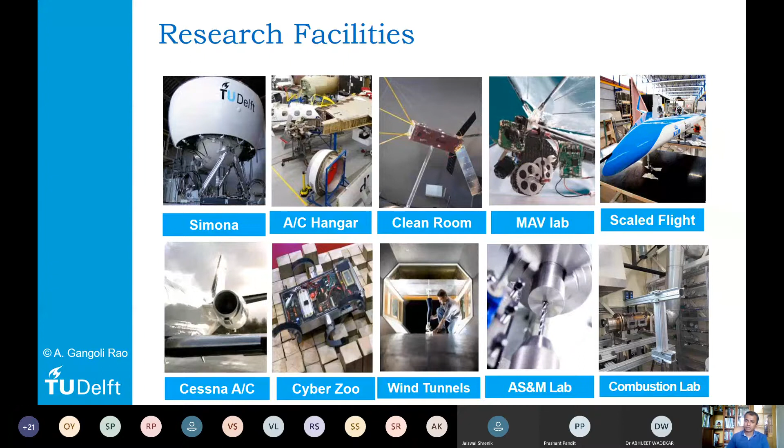Okay, so let's go to the topic and let's talk about the first flight. Again, if you have any questions, please do not hesitate to put them in the chat box.

So the first flight, I mean, flying has always been a dream. Whenever we see birds, we think, wow, they can fly, can we do that as well, right? I would like to ask you a question. You don't have to answer now, but think for yourself: would we fly if there were no birds in the world? That's, of course, a kind of philosophical question. But think about it.

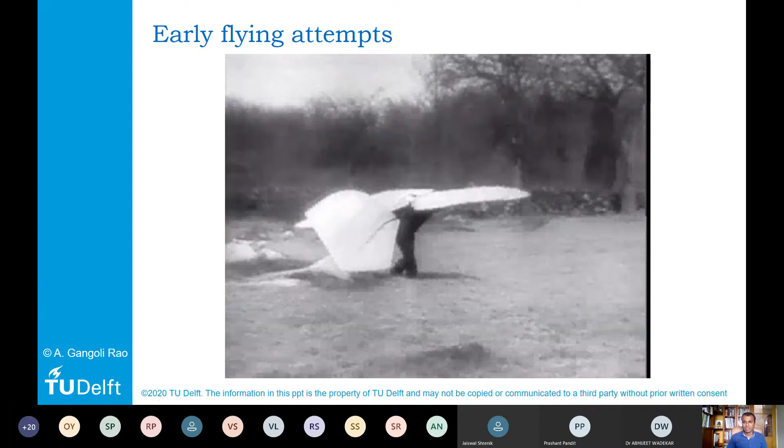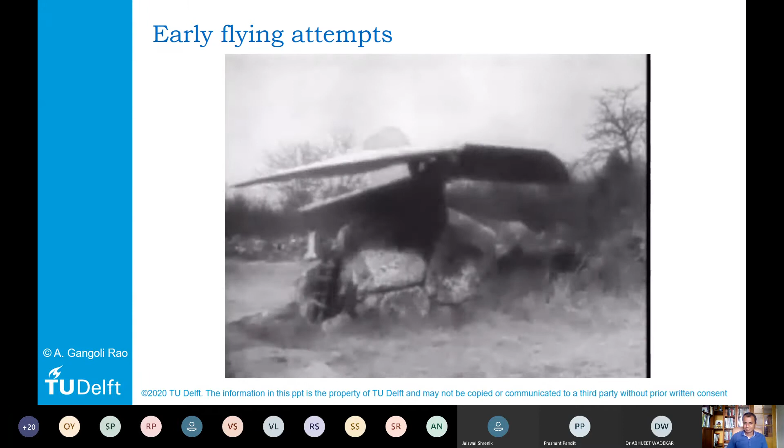Now, when you look at the early attempts at flying, of course, people thought the best way to fly is to imitate birds. There are some videos that I'm going to show you, and that's how people tried to fly. And so this happened, right? In this case, the person is just jumping off a rock, but in many cases they jumped off cliffs, and many people actually ended up losing their lives. Very soon we understood that our system of muscles is not capable of generating enough power to provide lift.

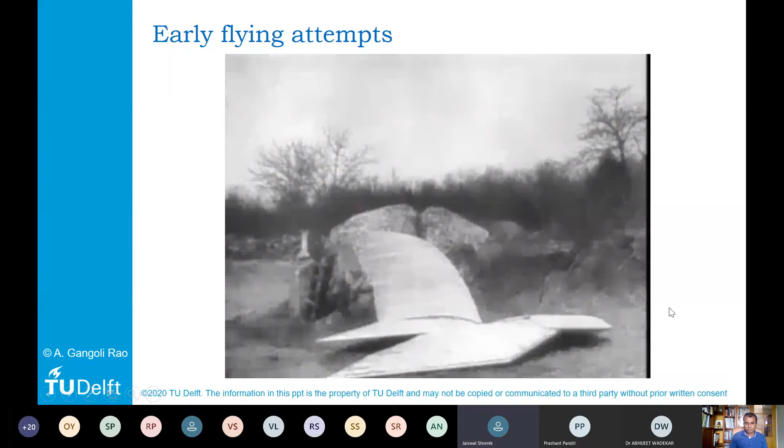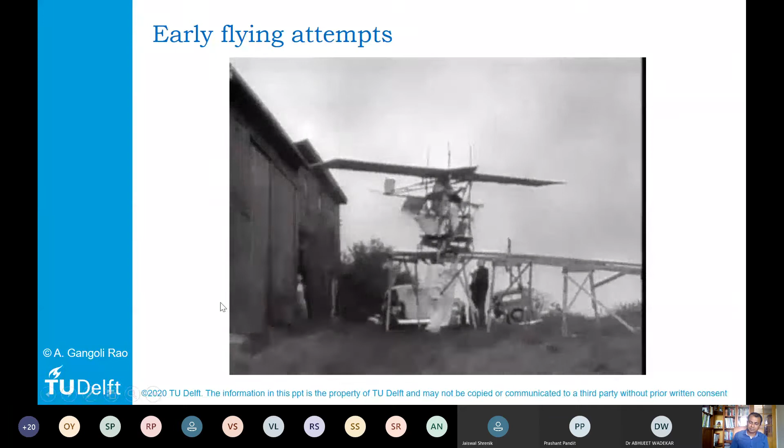And so the idea of having a machine to do that came early on. So there are some other examples. Here you already see a kind of machine where there is some kind of wing and some kind of propulsion system, not very elegant, but nevertheless, these were the early days of aviation, and people were trying all kinds of things. So let's go here and see. You see that a large number of attempts were carried out, and not many of them were successful. But over time, the thinking evolved, and people learned from their mistakes.

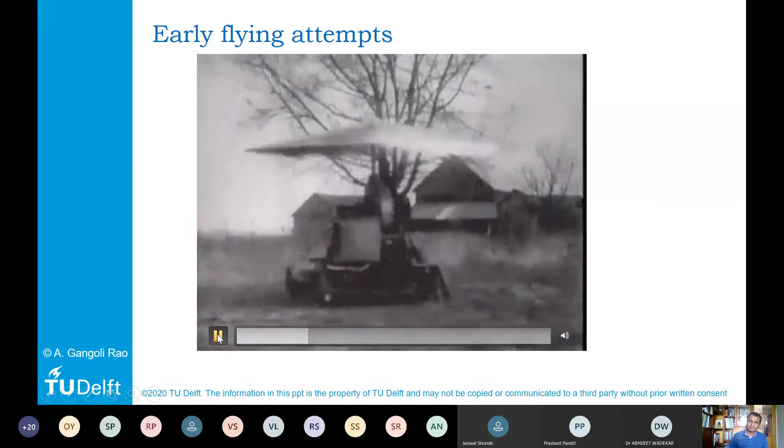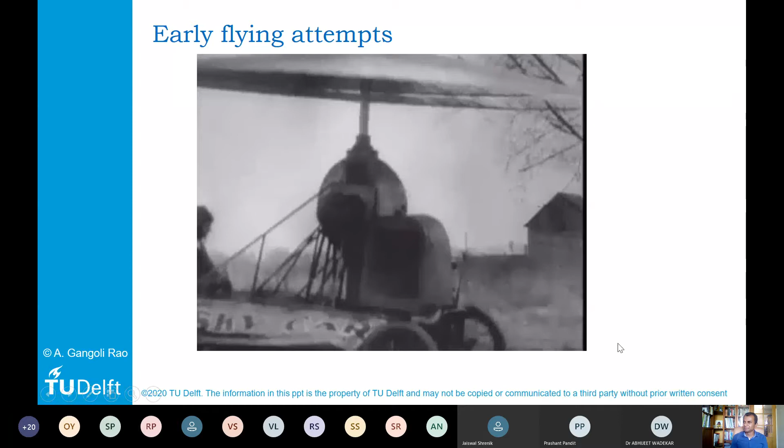And there were some other crazy ideas as well, for example, this machine was called Sky Car, but it did not take off from the ground. So again, there were many more attempts. Now, one of the first persons to actually formalize this discipline was Sir George Cayley, and he was one of the first to apply scientific methods to study flight, to study the lift that is produced, and so on.

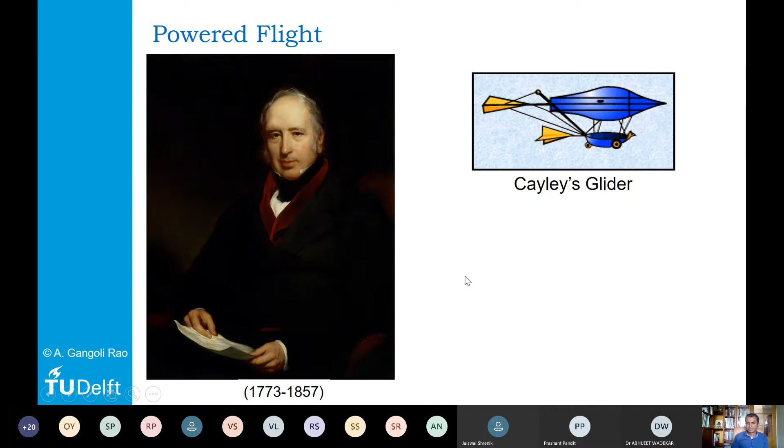And he's sort of considered the father of aviation, in a sense. And one of the important things that he pointed out is that powered flight would be possible if an engine would be able to produce more power in proportion to its weight. So he coined this term that we now refer to as power to weight ratio. And that's very, very critical.

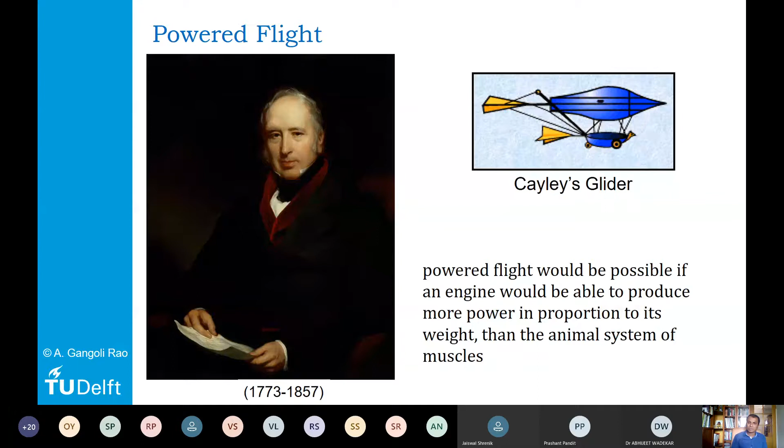So he understood the importance of weight and the importance of power. And he also understood that if you want to take off from the ground, then you have to produce a lot of power without weighing too much. So he was one of the first ones to formalize many of these concepts that we take for granted today.

Okay, so the first thing about this flight was that it was a powered flight. It was heavier than air flight. It was a controlled flight. So for example, hot air balloons were existing before this, okay? But they were not heavier than air.

A hot air balloon works because that hot air has lower density and it creates its own lift. So it's lighter than air, and of course, hot air balloons cannot be controlled. So you are always at the mercy of the winds, and you go where the winds take you. So this was the first manned, powered, controlled, and heavier than air flight, and that's why this is called the first flight.

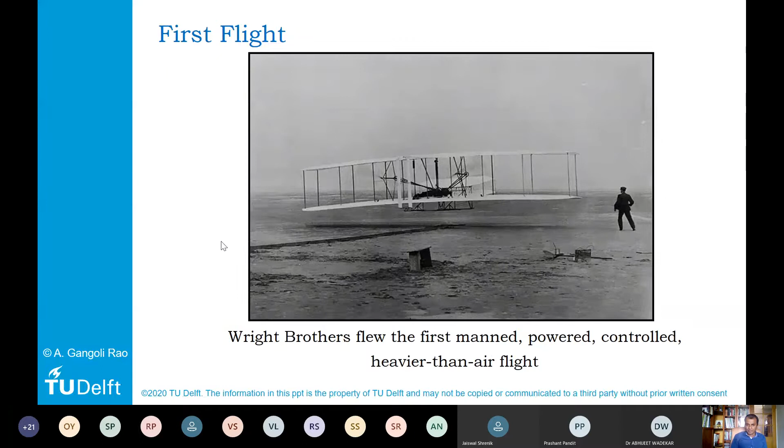So when you look at this first flight, which happened in 1903, 17th of December, in Kitty Hawk Beach in North Carolina, what you see is that the first flight was actually not much. It was only 120 feet and lasted 12 seconds. When you consider 120 feet, this is actually less than the wingspan of a Boeing 747. So in terms of span, it was not much, but it still created history at that point.

And of course, they had several more tests on that day, and in the last flight on that day, they also crashed. But you already see that they achieved quite a remarkable distance, more than 800 feet, and flying for almost a minute. So you already see that there were quite some improvements. Now let's see how things evolved as we went along.

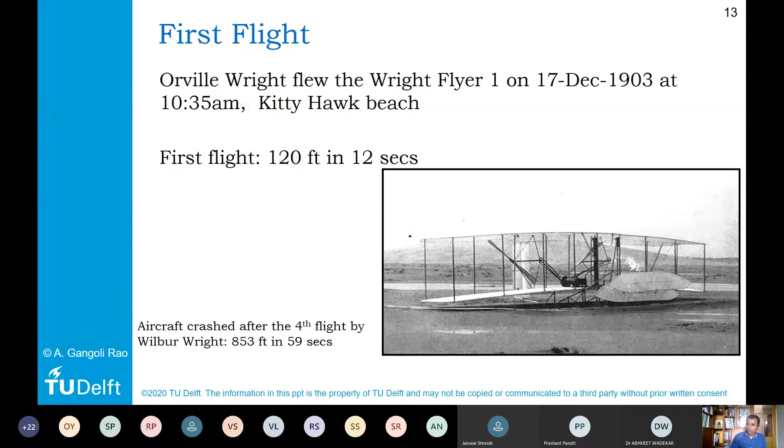So one of the main things that was key for the Wright brothers, apart from the fact that they had to design this biplane and also design their own propellers and so on, one of the key things that enabled them to do this is actually the IC engine. The IC engine was the best power to weight ratio available at that time. If you look at this engine, which from today's standards is quite rudimentary, it weighed around 90 kilograms and produced around 12 horsepower.

Now, 12 horsepower is not much, right? I'm sure most of you must be using bikes or cars, and they have much more power than this. But for that time, this was quite state of the art. And remember that this was still an uncooled engine, so they could not use this engine for a long time. So the propulsion system was one of the key factors in enabling them to provide enough power without having to weigh a lot.

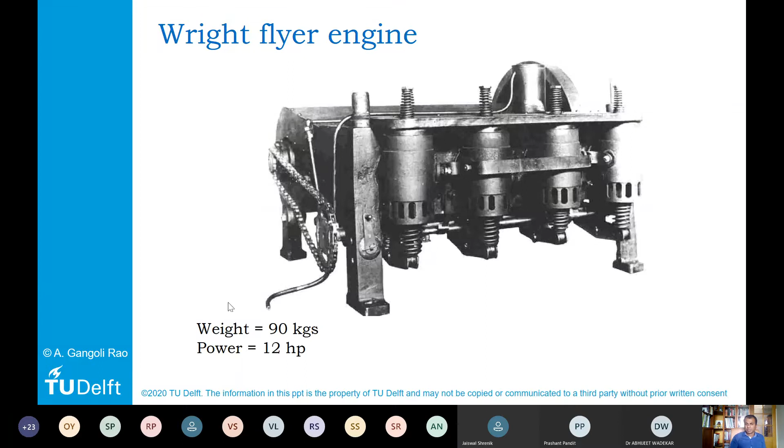And before this, there were also other attempts by other people where they tried to use something like a steam engine, but the steam engine was extremely heavy. So you see that progress in science always happens over a period of time, and a large number of people are involved. That's why it is important that in the scientific community you always share your understanding, so people don't have to repeat the mistakes that someone else has made. And that's why we have all these journal papers where we disseminate our knowledge.

Okay. So let's change gears. We talked about the first flight. That was approximately 117 years back, and let's look at how things have progressed. When you look at aviation, the progress in the early years was fantastic. After the Second World War, there was a huge change in civil aviation.

So in terms of distance, the first flight was only 853 feet. Today you would take a super jumbo like the A380, a beautiful aircraft. Airbus stopped producing this, but I think it's very elegant, huge, 550 tons takeoff weight, and in a single class seating capacity it can carry almost 800 passengers all the way to around 14 to 15,000 kilometers. That's the kind of distance an aircraft can cover today.

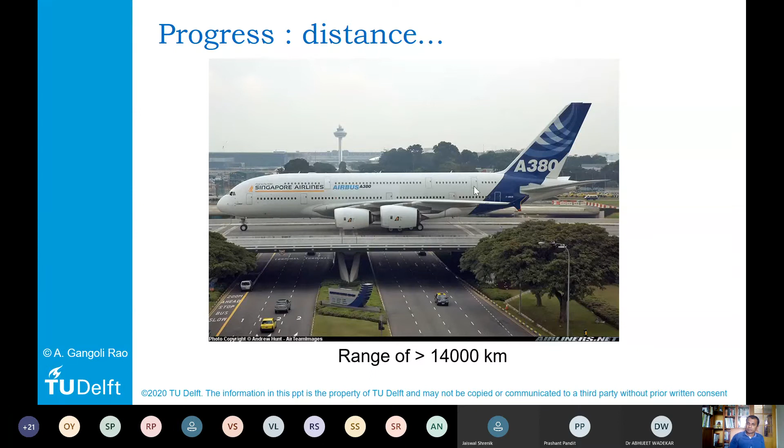In fact, the next generation 777X and also the long range A350-1000 can go almost 18,000 kilometers or so. It shows you how much progress has been made.

In terms of payload, the first flight could carry only Orville Wright as the payload - one person. But then you see this huge monster called the Antonov 225. It's a fantastic and beautiful aircraft with a payload of 250 tons. It was designed for the Russian space program, but it has been used all over for all kinds of things, and it's still one of the most reliable ways to transfer heavy material in a short period of time. And of course you see these huge turbofan engines, six of them.

One of the interesting features I find, apart from the engines - every feature of this aircraft is beautiful - but one of the most intriguing features, I think, are the landing gears. When you look at them, they're huge. It's mind-boggling to see there are so many landing gears for such an aircraft.

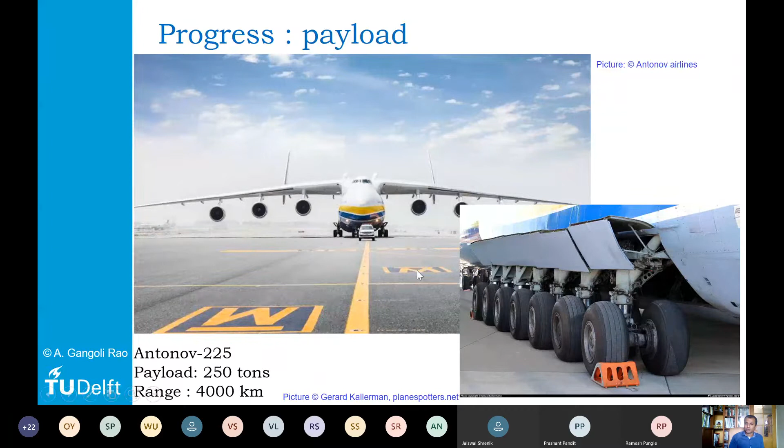In terms of speed, the Wright brothers' first flight was something like 20 feet per second. Whereas there was the Concorde aircraft, which unfortunately does not fly anymore, but Concorde already broke the speed record for civil aviation, flying at around Mach 2.2 - that means 2.2 times the speed of sound - at around 18 kilometers altitude.

In fact you could take off from Paris and land in New York, and if you took off from Paris at let's say 8 o'clock in the morning, you would land in New York before it becomes 8 in the morning there. So you could sort of cheat the time a bit, in a sense. That was a fantastic aircraft, but unfortunately commercially not successful.

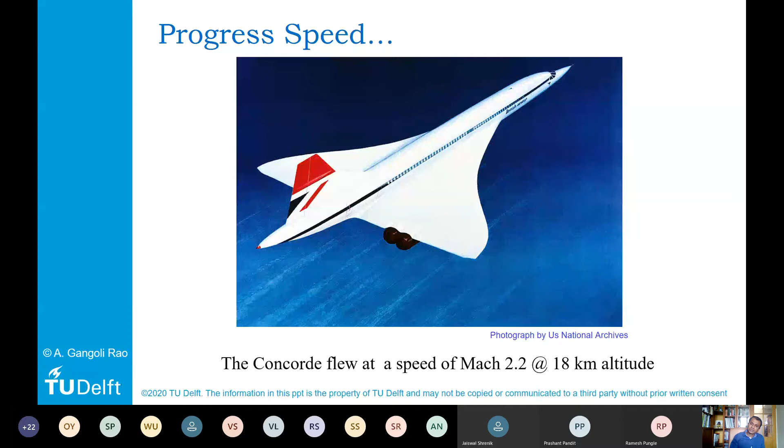There are several reasons for it, but one of the main things is that when you fly supersonic, the amount of fuel consumption is extremely high. And of course there are environmental problems as well as noise problems.

Now that we've looked at the progress that has been made, let's look at some of the basic principles of propulsion. I'm starting at a very basic level - how do you propel things?

One way is to take a balloon. We have all done this as children - we blew air into it, let it go, and it just went randomly everywhere. That's what happens, right? But when you think of it, there is a propulsion principle here.

The pressure inside the balloon is high, the pressure outside in the atmosphere is lower, and because of the pressure difference, the air actually comes out. As it comes out, it accelerates, so the jet velocity is high. There's a change in the momentum of the air that was inside, and this change of momentum produces force - that's Newton's second law of motion. Because every force has an equal and opposite reaction, you get thrust. So from a principle point of view, it is pretty easy.

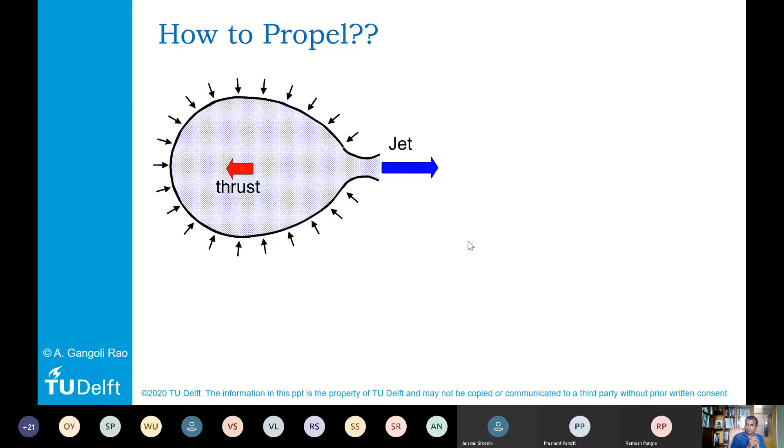The other toy most of us used as kids is this kind of Chinese propeller, where you just rotate it and it goes up. Again, the principle is the same - it cuts the air and accelerates it, pushing the air down, and in that process it creates an upward force. So this is the basic principle of propulsion - you change the momentum of the fluid.

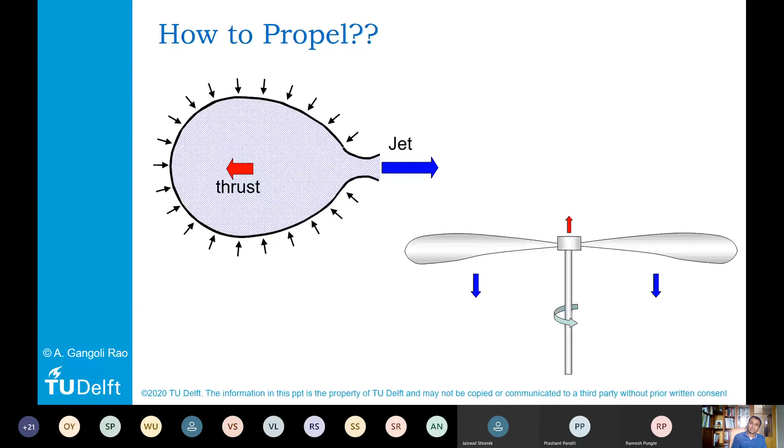And in most cases it is air. For aircraft it is air, and for rockets, since they operate in an environment where air is not available, they use another fluid. That's why a rocket has to carry both the oxidizer and the propellant, whereas in an aircraft you don't have to do that - we always use the ambient air.

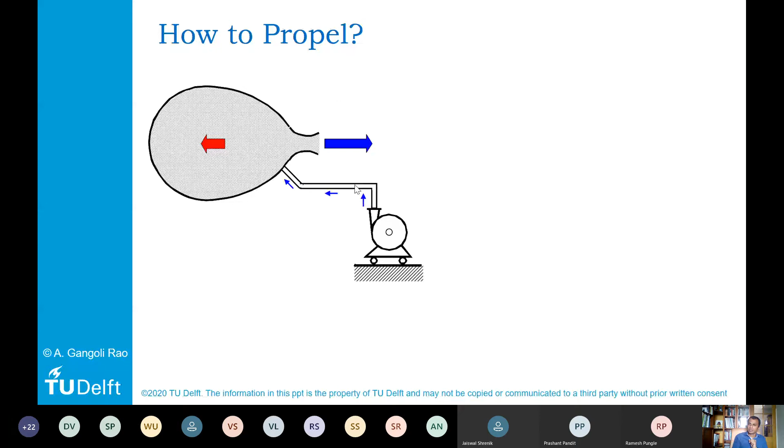Okay, so if this is the main principle of propulsion, what can you do? Let's take this balloon as an example. Of course, when you release a balloon, it will go only a few meters, and that's it. But if you want to sustain this balloon for a longer time, maybe you have to connect it with compressed air, so that a pipe is giving continuous pressurized air to this balloon, and then it's coming out, and in that process the balloon will hopefully go a bit longer. But it's not a smart thing to do, right? You always need some kind of connection and so on.

One slight improvement over this concept would be if you have a kind of compressor in the balloon itself. Theoretically, hypothetically, you can have a small compressor in the balloon, and that compressor is rotated by a motor, and this motor is given electricity. If you don't want this electrical wire, you can have some kind of batteries. That can also be done.

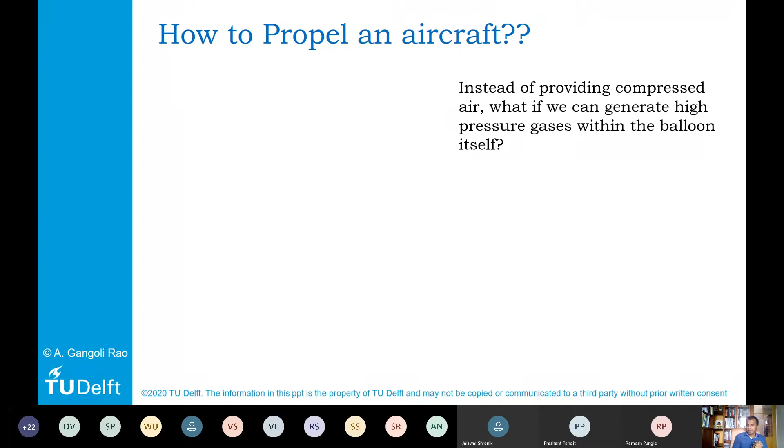Now, of course, this cannot happen in a perpetual way, because the power produced by the turbine is not equal to that of the compressor if you do not add additional energy into it. So in order to sustain the process, you have to have additional energy input to this compressed air, and that is done by a combustion chamber.

So what is done is you have a compressor where the air goes in and increases in pressure. You add fuel to this compressed air and burn it. So at the end of the combustion chamber, you not only have high pressure air, but also high pressure and high temperature air. Now the turbine, at the end of the combustion chamber, extracts power from this high pressure, high temperature air. But even after the turbine has extracted the power required for running this compressor, there is still a part of the power left, and that part can be used for propulsion.

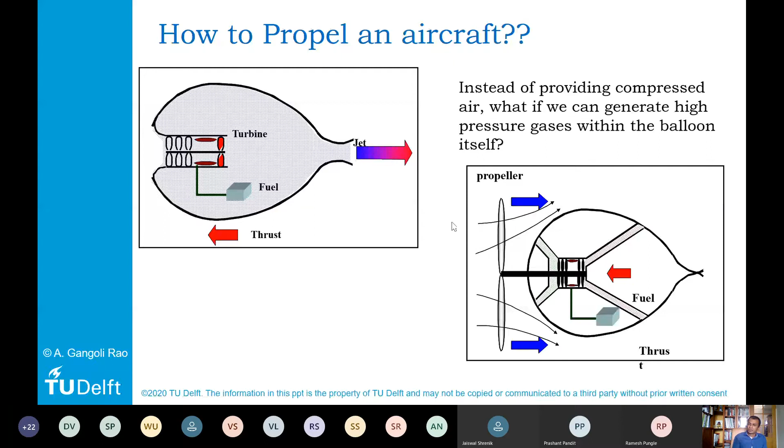So this is, in a very basic and schematic way, how you can visualize this. Of course you can do it in a different way, you can also add a propeller and so on, but nevertheless, this is the basic principle of a jet engine.

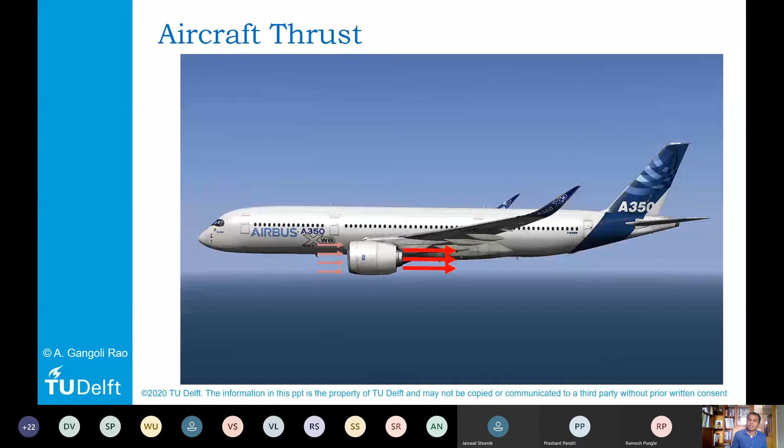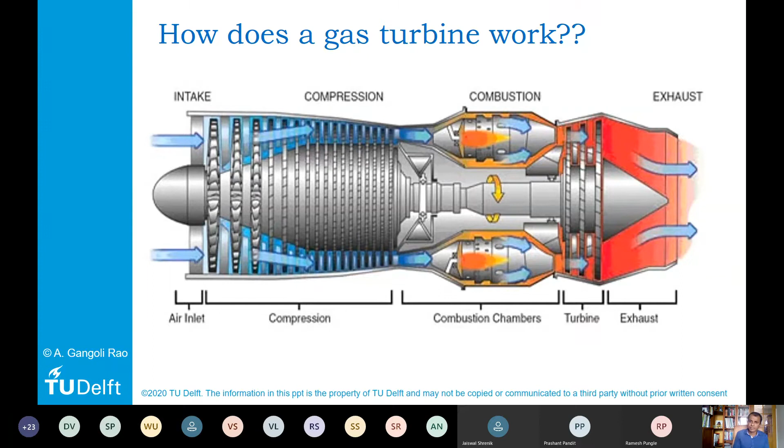Well, at least for mechanical engineering students, you must have learned about TS diagrams, and they are very, very important actually. Even in my lectures, I use the TS diagram all the time, and just by using the TS diagram, you can do a lot of calculations and also explain a lot of phenomena.

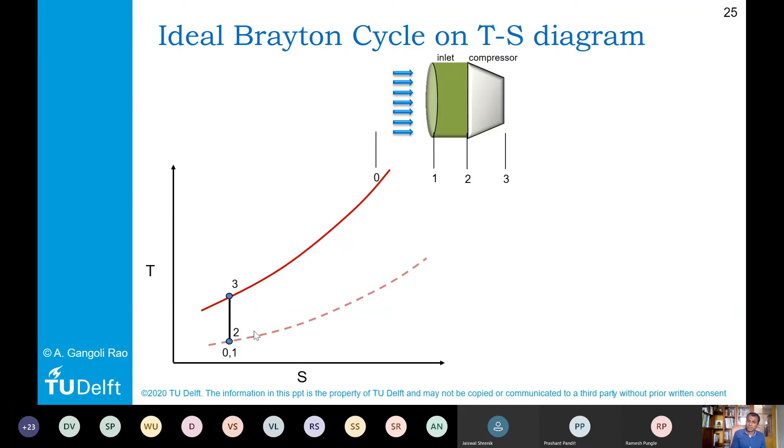And then you have a compressor. The compressor would increase the pressure as well as temperature. So you see that this solid line is at a higher pressure and the dotted line is at a lower pressure. And assuming isentropic compression in an ideal case, your point 3 would be here.

So the turbine is driving the compressor, and then the remaining power can be used for whatever purposes. In case of a jet engine, it is used for creating thrust, whereas in industrial gas turbines, you can add more turbine stages and then connect it to a generator to produce power. You can also connect more turbine stages and then connect it to a rotor, like in a helicopter engine, or to a propeller, like in a turboprop engine. So you can do all kinds of things.

But the basic working principle is still what is called the Brayton or the Joule cycle.

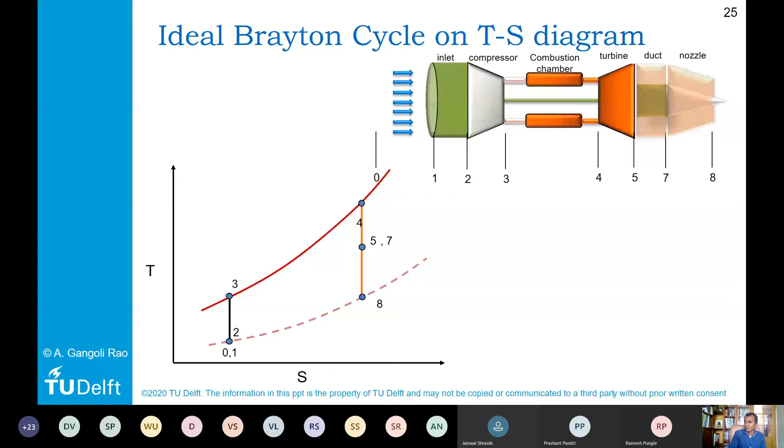Now, if you compare a gas turbine with an internal combustion engine, which you must have studied in your bachelor's, the processes are not very different. It's still more or less the same. You have an intake, you have compression, you have combustion, and then you have exhaust.

But the main difference is that first of all, an IC engine, in that sense, is an intermittent cycle. So you have one power stroke in a four-stroke engine, out of four strokes, whereas in a gas turbine engine, this is a continuous cycle. And that's why the specific power output of a gas turbine is extremely high as compared to that of an internal combustion engine, or a reciprocating engine, to be more precise.

So a reciprocating engine has its own advantages, but it also has its own limitations. Whereas when you look at something like a gas turbine cycle, it is a continuous cycle, and the specific power output can be much higher, and also the efficiency can be much higher if the operating pressure ratio is high.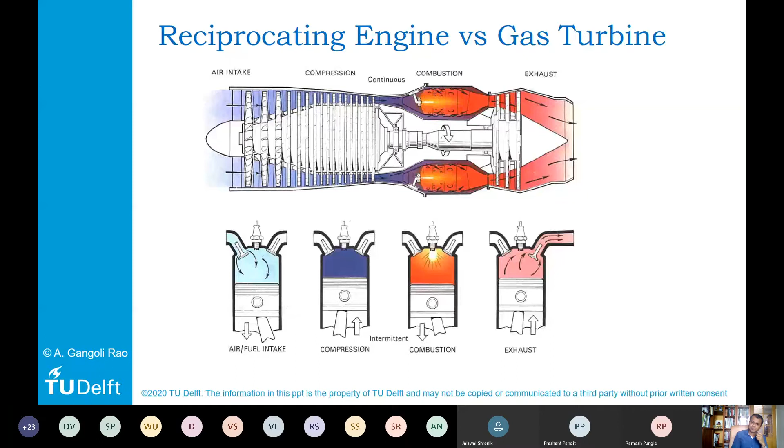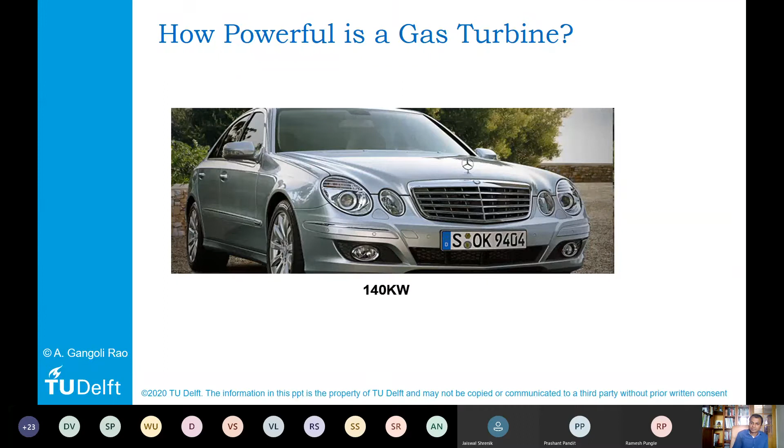So let's see how powerful is a gas turbine. Now, just for the sake of simplicity, if you have a fancy car, then you typically have around 150 to 200 kilowatts of power. And if you have an even more fancy car, so people who don't know what to do with their money and are mentally not grown up, they buy these kinds of fancy cars like Ferrari. And you can see you can have around 400 to 500 kilowatts of power.

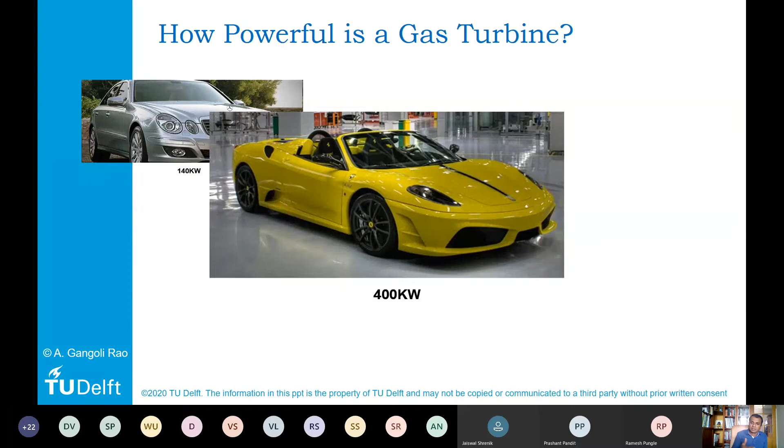But then if you look at one engine of something like a 747, then you have approximately 30,000 kilowatts of power that is produced. So you see the difference in the magnitude of the power. That means that one turbofan engine is almost equal to around 80 Ferrari engines. And remember that at full takeoff thrust, a bigger aircraft like the A380 or the 747 has four of these engines.

So that's why you can accelerate from standstill to around 250 kilometers per hour in such a short distance, in such a short time, and then you can take off. So this high amount of power is a specialty of the gas turbine, and that's why we use these in aircraft.

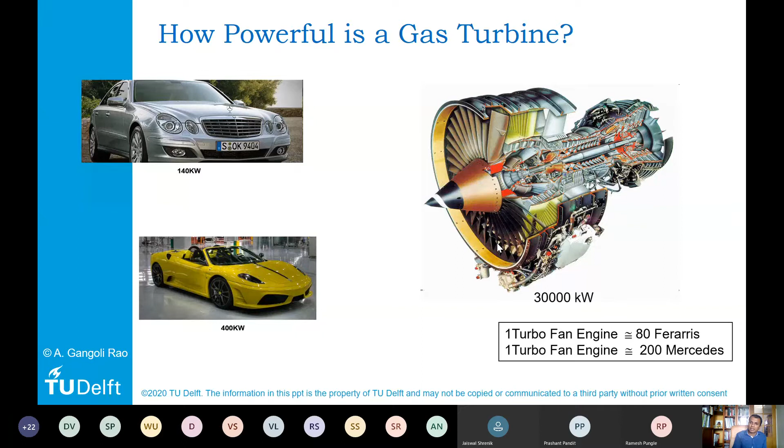Okay, so let's look at the propulsion system in a different way. What are the main elements of an aircraft propulsion system? First of all, there are three main elements. First is the energy source. You have to carry an energy source on board an aircraft which will provide the energy. Then you have to convert this energy into work, and this work then has to be converted into thrust.

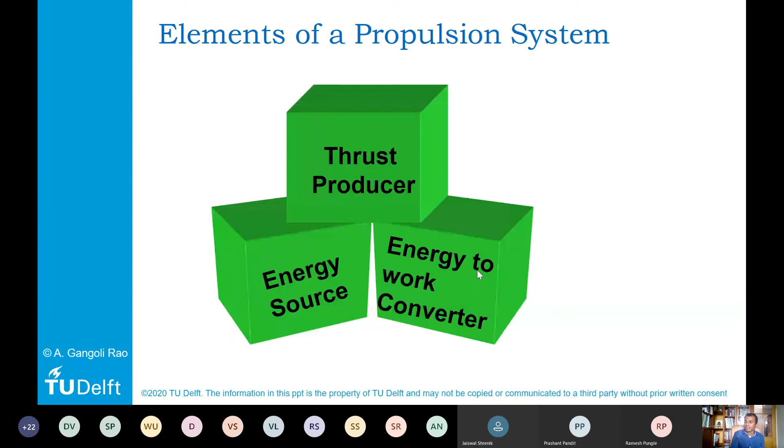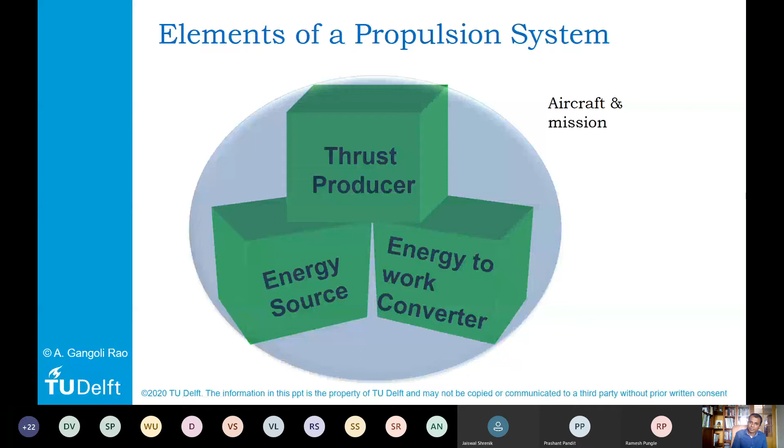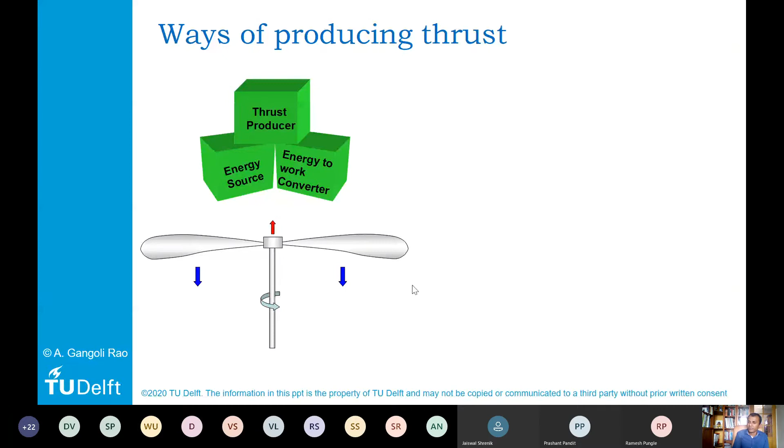And of course, you have to do this all in conjunction with the aircraft and its mission. What do I mean by this? I'll give you some examples. In terms of the thrust producer, we already saw these examples. We could either use a kind of propeller, or we could use a nozzle to create thrust. So we already looked at that, and this part is covered.

In terms of the energy source, we could use different energy sources. So for the students who are out there, maybe you can write some of the energy sources that you can use for aircraft in the chat box. What do you think are the different types of energy sources that we can use for aircraft propulsion? It can be small aircraft, big aircraft, or something else. So don't be shy.

I don't see any messages. Is there a problem with the chat box? They are blocked. Sorry? The chat is blocked? Yes. Oh, okay, I'm sorry to hear that. But actually, that's not a problem.

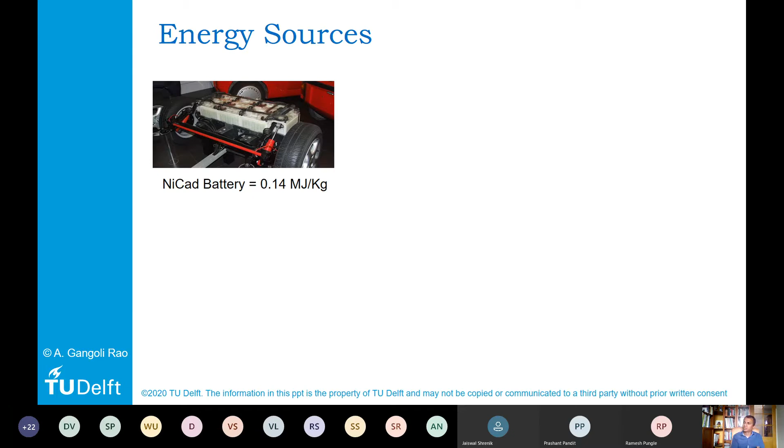So it's approximately around 0.14, 0.15 megajoules per kilogram. Okay, so not much. But if you take something like lithium-ion batteries, then you can go up to almost 1 megajoule per kilogram. So you see that the energy density is already better for lithium-ion batteries. Of course, there are some experimental batteries like lithium sulfur and metal air batteries where, at least the hope is that the energy density can go up to around 2 or 3 megajoules per kilogram.

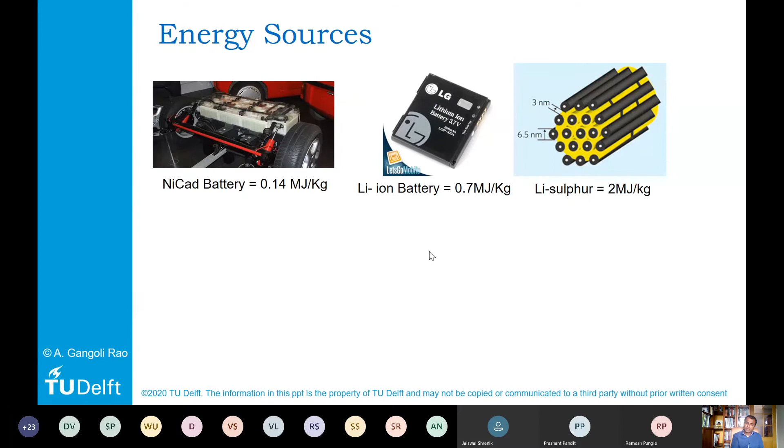But when you look at kerosene that is typically used in aircraft, you see that it's approximately around 43 megajoules per kilogram. So kerosene is a very energy dense fuel. It is similar to diesel, by the way. So that's why an aircraft can go to a very long distance because of this energy density.

Of course, you could also think of hydrogen. Hydrogen also has very high energy density, but it also requires more volume. And so if you want to carry hydrogen in an aircraft, you have to do it in a liquefied form, liquid hydrogen. And liquid hydrogen has to be stored under very cold temperatures. That means that you cannot store it in the wings, and you have to store it in the fuselage. I'll give you some examples of this later on. And that is a problem with hydrogen.

Well, believe it or not, after the Second World War, in the late 40s and the 50s, there were serious attempts of using uranium, or let's say a nuclear-powered aircraft, both in the US as well as in Russia. And of course, you see nuclear-powered submarines, nuclear-powered ships. So when you take something like an aircraft carrier, many of these aircraft carriers tend to be nuclear powered, so you can use these aircraft carriers for approximately 15 years without refueling.

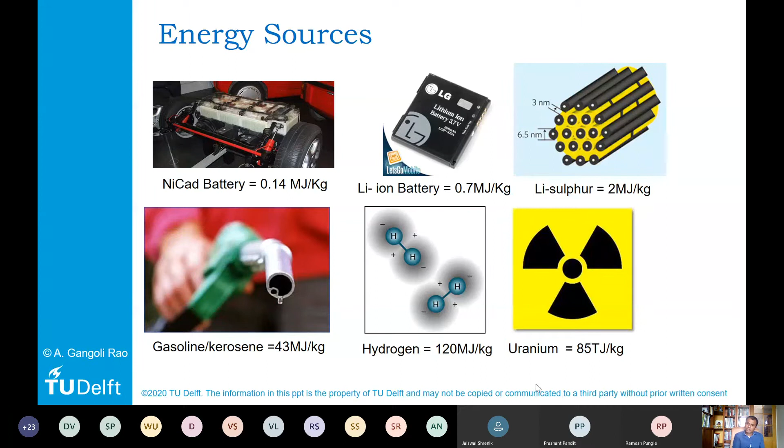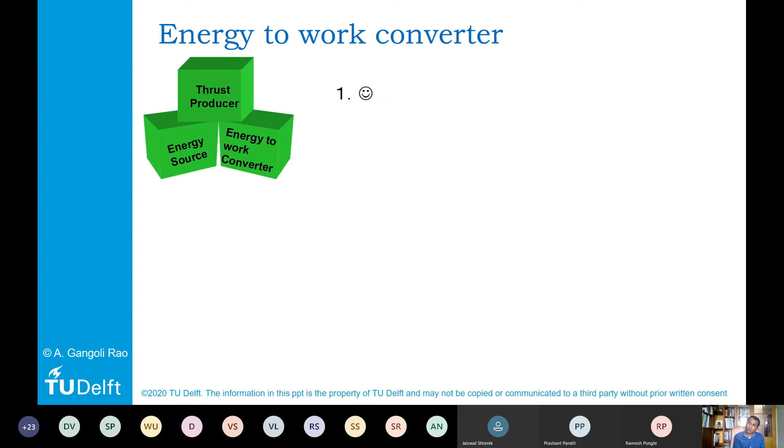Of course, the problem with nuclear power on board an aircraft is that the weight of the shielding is extremely high, and in case of an unlikely scenario of a crash, there's a huge danger of radiation leakage. So that's why this is ruled out. But in principle, you can use different kinds of energy sources. Of course, you also have to convert this energy into work, to drive the propeller or to produce hot gases, which can then be used from the nozzle.

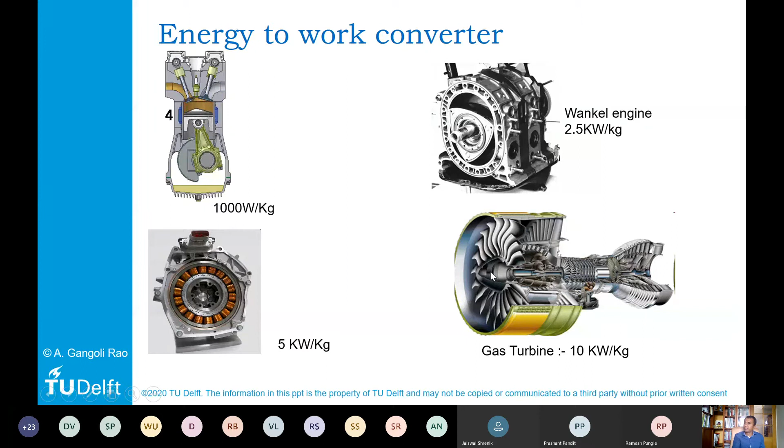So when you look at different examples, you talk about the IC engine, internal combustion engine, reciprocating engine. The state of the art used for high performance cars have approximately 1 kilowatt per kilogram, maybe a bit more. If you use electrical motors, then they're approximately 5 kilowatt per kilogram. If you use Wankel engines, then they are around 2.5 kilowatt per kilogram. But if you use a gas turbine, then it's around 10 kilowatts or even more per kilogram. So you see why a gas turbine is used, because it has extremely high power density.

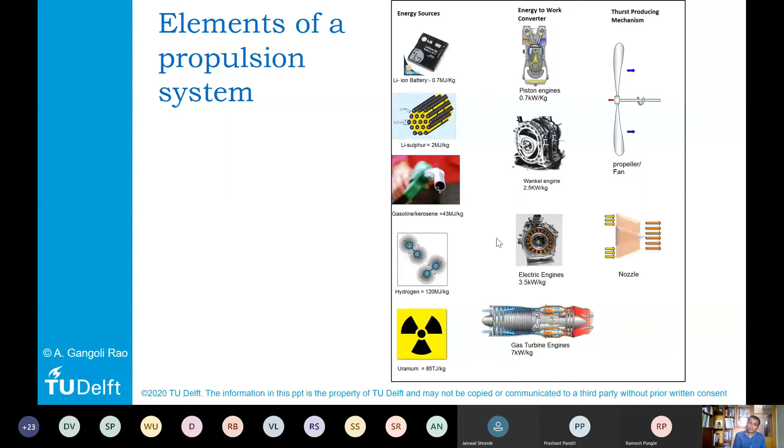Okay, and that is also one of the reasons why over a period of time, aircraft tickets have become much cheaper. I mean, more and more people in the world fly today than ever before. Of course, I'm talking about pre-corona times. Yeah, and flying in an aircraft is not so expensive anymore. And one of the main reasons is because of the decrease in the fuel consumption, because fuel cost is one of the main costs for an airline.

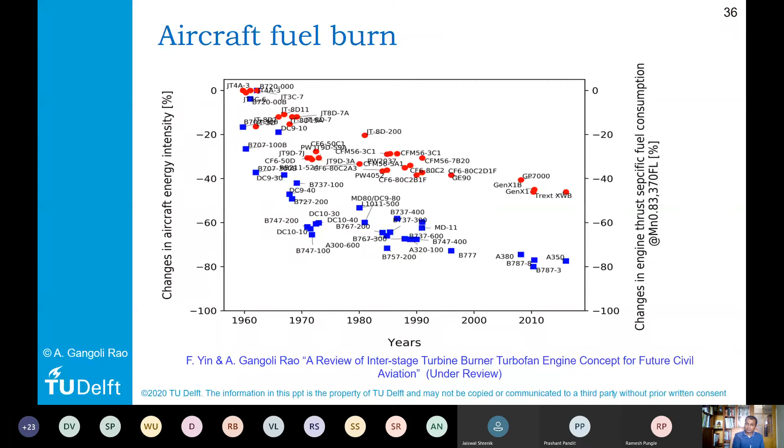Okay, so engines have become much more efficient, and that means that the aircraft also has become more efficient. Of course, there are other things as well. For example, the aerodynamics of the aircraft has improved, the structural weight has reduced, and so on. Okay. So we covered a bit about the history, a bit about the basics of propulsion, and then the question is, what can we expect for the future? Okay. So let's take a look at that.

Now, one of the things, as we were talking about, is because more and more people are traveling. Okay, so you see more and more aircraft in the air at any point of time. So pre-corona times, there are around 25,000 aircraft in the air being used worldwide. And what you see here is the increase in the passenger numbers, right from the early 70s to now. So approximately around 4.5 billion passengers traveled by air in late 2019 or early 2020 before the Corona crisis happened.

And the air traffic is growing at around 4-5% every year. Of course, it depends from region to region. For example, in India, it grew in double digits, 12%, 13%, 15%. Whereas in Europe, because we are already at a developed stage, the growth was not as much. But still, when you look at the worldwide average, it has grown more than 5% over the last 10, 15 years. So which means that the air traffic actually doubles every 15 years. And that is a huge challenge, of course, and that's why there are longer lines in airports and so on and so forth.

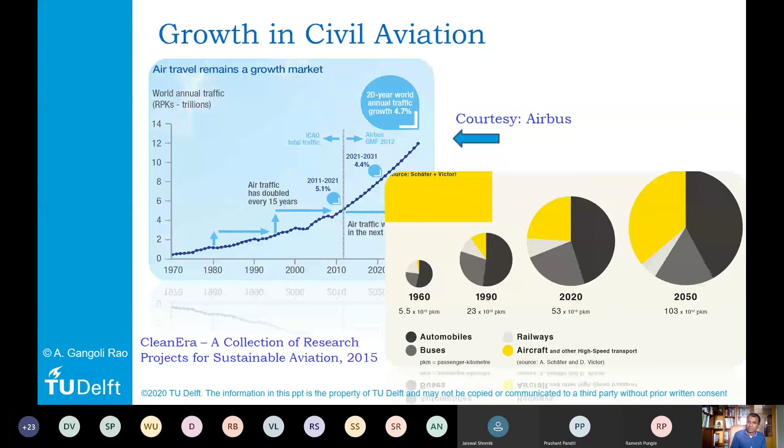So that has to reduce. Okay, so when you look in terms of emissions that come out from an aircraft, of course, it's burning kerosene, so there are emissions. And apart from water vapor and CO2, which is the product of any hydrocarbon combustion, you also have NOx, which is NO, NO2, and then you have sulfur dioxide, you have carbon monoxide, you have unburned hydrocarbons, and you have soot.

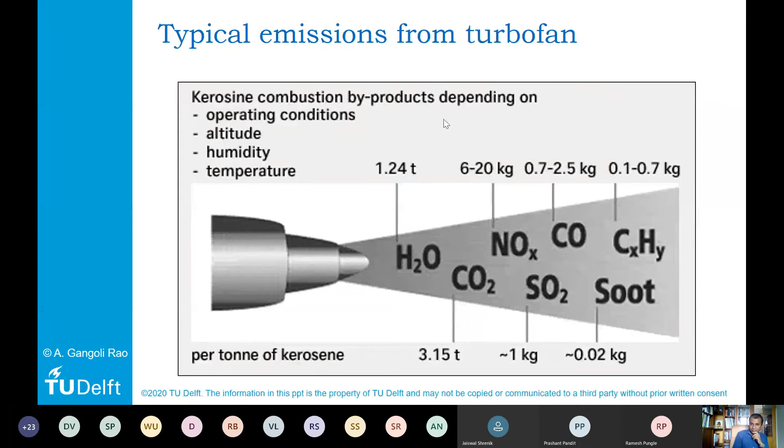So all these emissions, they have different impacts. At the ground level, of course, near the airport, they have a different impact. But when the aircraft is cruising at 10 or 11 kilometers altitude, then it has quite a big impact on the global warming. Okay, so these are the things that have to be reduced.

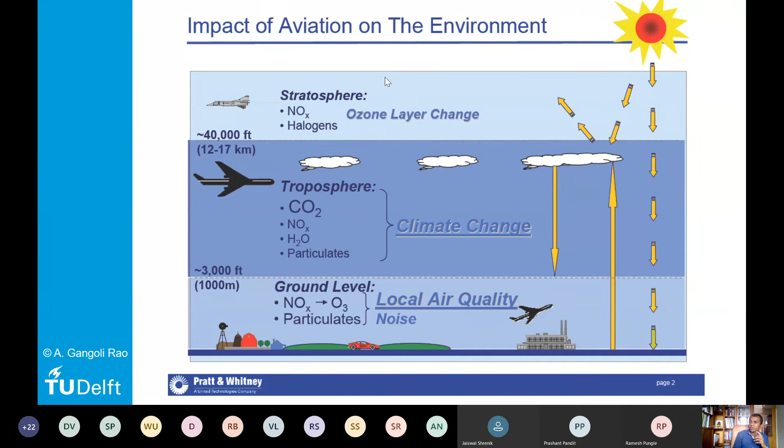So up till around 1,000 meters, let's say around a kilometer, of course, the local air quality is changed because of aircraft. But when it is flying at around 10, 11 kilometers altitude, then it changes the climate. Yeah. And these are for military aviation, but from a volume point of view, it is not so much as compared to civil aviation. Okay, so

now at least in Europe and also in the US, there is this advisory committee for aeronautics research in Europe, and the aim is how will aviation grow in the coming years, and the goal is that for a new aircraft in 2050, the aim is to reduce the CO2 emission by approximately 75% as compared to an aircraft in 2000.

And the NOx emission by around 90% as compared to an aircraft in 2000, and the noise emission by around 65% as compared to an aircraft in 2000. And these are extremely ambitious goals, and this is where Europe as well as the European Commission is putting a lot of emphasis and money in terms of making sure that our aircraft become more sustainable. So there's a huge political drive also to reduce emissions from aviation.

And one, of course, we have to make the engines better. We have to improve the aerodynamics. We have to reduce the structural weight. But one way to reduce the emissions from aircraft is also to look at different energy sources. So, of course, when we talk about energy sources, again, coming back to mass energy density, this is one of the main criteria. And the other criteria is what is called the volumetric energy density. Okay.

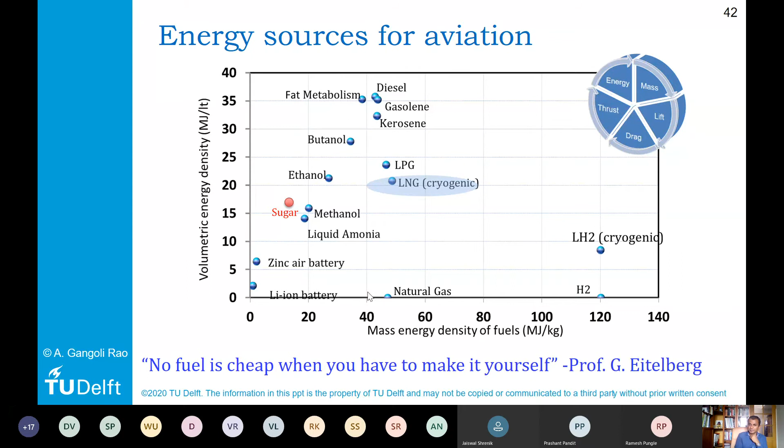Well, we also have to keep in mind that if we start using other fuels, they might be expensive compared to kerosene. Now, what are we looking at actually? Most of the projects that we are doing are in conjunction with Airbus or the European Commission.

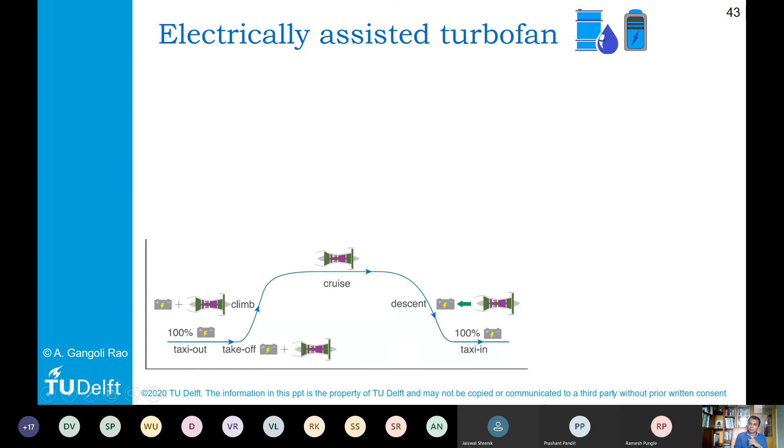We are looking at ways to make aircraft more efficient, less polluting, and sustainable. One example is hybrid electric systems, where we incorporate electric motors within a gas turbine to boost power at certain phases, allowing a better operating point during cruise. Also for taxiing, we can use only motors instead of engines, reducing local air pollution. These are some of the concepts we have looked at, and I have mentioned some publications.

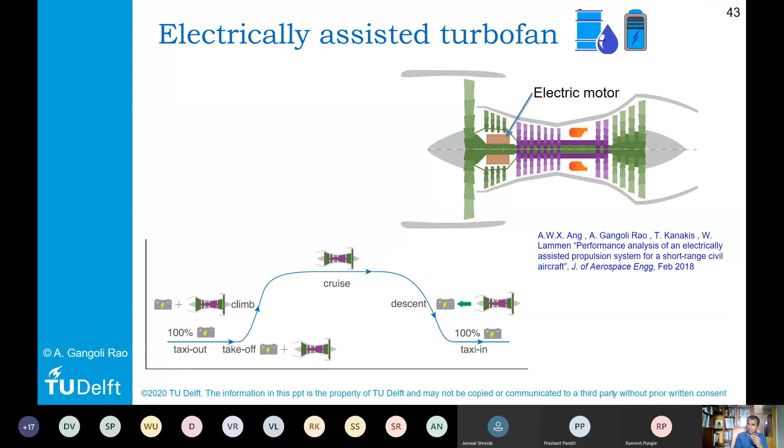We are also active in another European project along with Airbus and Bauhaus Luftfahrt from Germany, and some other universities, where we are looking at a hybrid electric architecture using an interesting technology called boundary layer ingestion. I don't have time to go into details, but it's very interesting in terms of how we can integrate engines with aircraft. We are using hybrid electric architecture to design a future twin aisle aircraft using this technology.

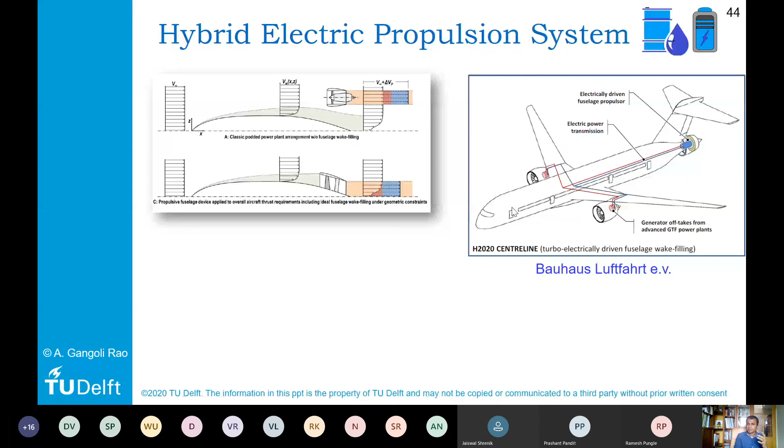This project is almost ending now. This is a schematic of the aircraft. These are the two regular gas turbines, this one and this one. The third one at the back is an electrically driven fan, and the electricity required to drive this fan comes from a generator, which is also driven by this engine. There are advantages to putting a fan here, this is what's called boundary layer ingestion. If you want more details, I've given the link of the project here.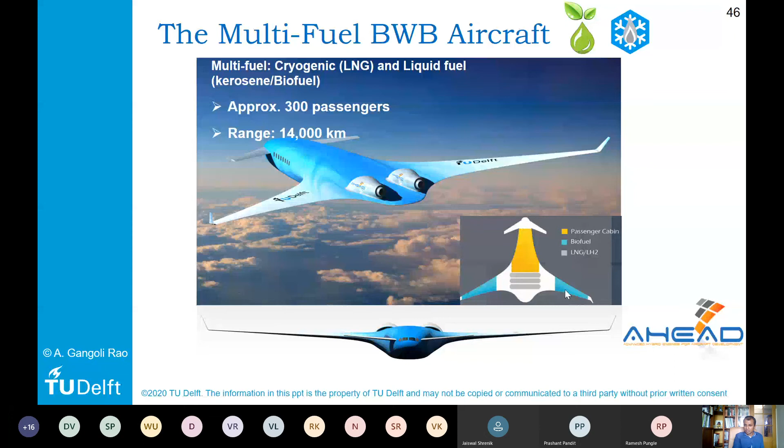We looked at the applicability of cryogenic fuels like LNG, liquefied natural gas, and liquid hydrogen, as well as biofuels in aviation. This is what's called a blended wing body aircraft. It had two engines, called hybrid engines, because they use two energy sources. I'll show you a schematic in a while. It uses canards as a stabilizing and controlling surface. Here you see the schematic of this aircraft. The yellow section is the passenger section. These are the tanks to store LNG, and the blue one is the biofuel.

One of the highlights of this project was that we designed a different kind of engine, with two combustion chambers. The first combustion chamber was located between the compressor and the turbine, like what I showed you in a normal turbojet.

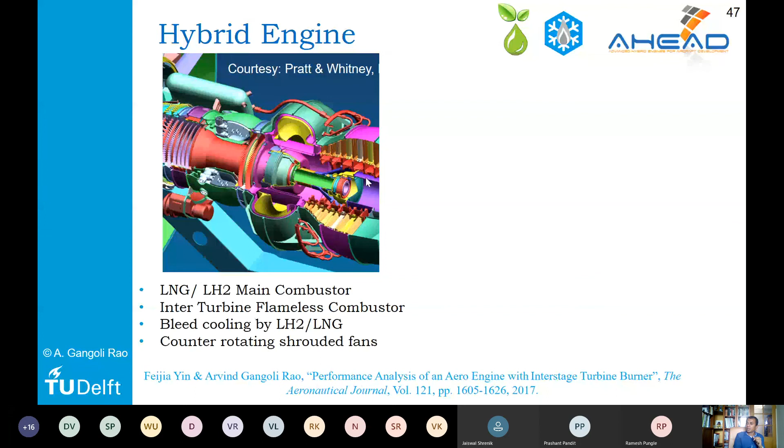But it also had a second combustion chamber, this toroidal second combustion chamber between the high pressure turbine and the low pressure turbine. Which means that the first combustion chamber could use LNG, methane or hydrogen, whereas the second combustion chamber could use biofuels. So this was what was called a hybrid engine, and it had several advantages.

We proved that by using such a novel engine as well as aircraft architecture, we could reduce the fuel consumption for a long-range mission as compared to a 777 aircraft, Boeing 777. This dark blue one is a Boeing 777, and the light blue one is the aircraft designed by us. We could reduce CO2 emission by approximately 50%, and reduce NOx emission by approximately 85 to 90%.

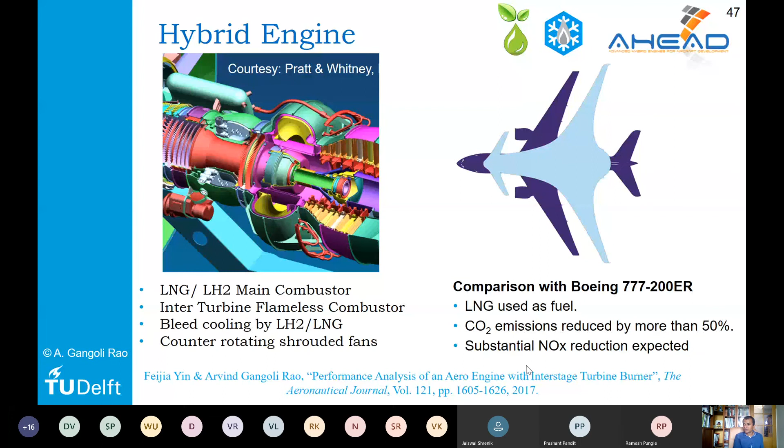This is an example of a very new, latest project that we started just a couple of weeks back, also with Airbus as well as with Safran, where we are looking at using hydrogen along with kerosene in aviation. This is supposed to be for the next generation of A320 Neo that will come around 2035.

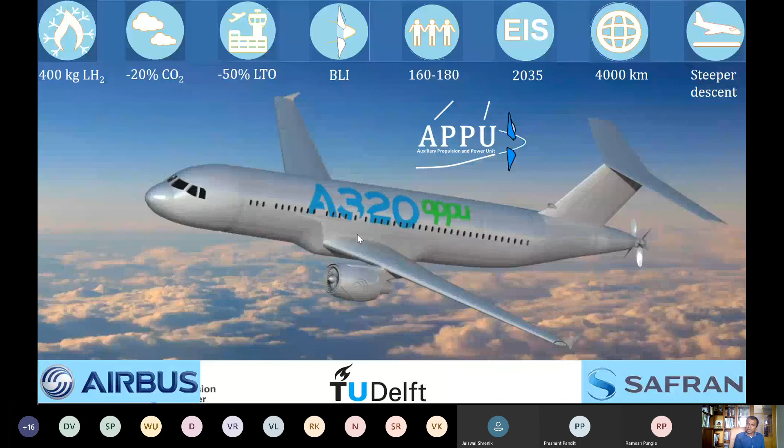So with that, I would like to close my presentation. Of course, if you have any questions, please feel free to ask. Thank you.

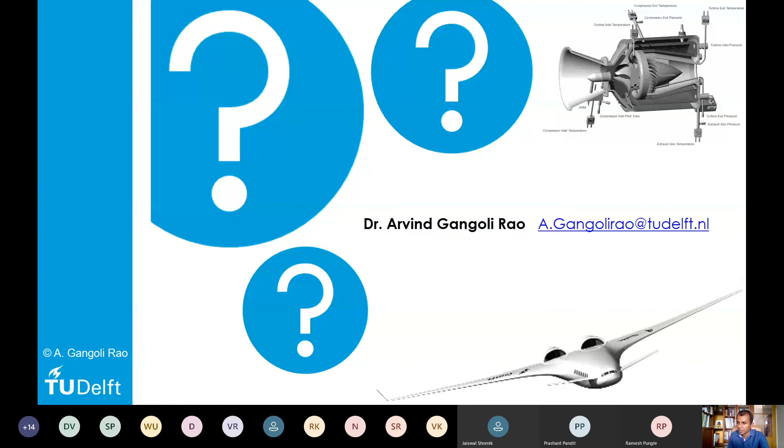I don't have a schematic at the moment to show that, but during a climb, let's say first we have to look at what happens in cruise, and then we can discuss what would happen in climb. Let me see if I can pull that out. Just give me one second.

Now what happens during climb, there are a couple more things. First of all, the aircraft is also accelerating, so you require energy to accelerate, and that energy has to be provided by the thrust.